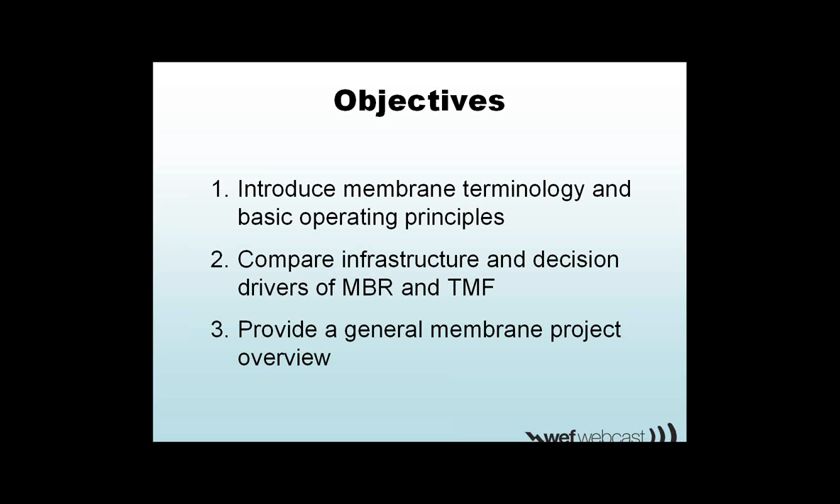Good morning. Give me just one second while I get my slides working here. There we go. So before I jump into the presentation, I'd like to give you an idea of the objectives for this first half-hour presentation. The first is to introduce membrane terminology and basic operating principles so that in the next two presentations you have some background on the vocabulary words that will be thrown around. Then to compare the infrastructure and decision drivers of membrane bioreactors and tertiary membrane filtration. And finally, to provide a general membrane project overview.

So what are the uses of reclaimed water? I think it's no surprise to anyone that there are a variety of uses for reclaimed water. A lot of what this water will be used for is driven by what's close to the treatment facility and really what the objectives are for going towards water reuse.

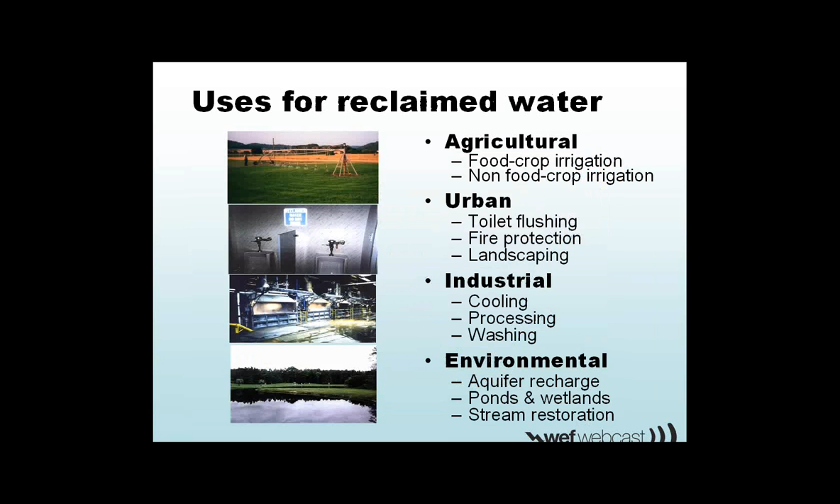Okay, so we've established membranes are great, but what is a membrane really? A membrane is a thin, semi-permeable polymeric film adhered to a support surface that retains some substances but not others. What does that really mean? Here's a very close-up view of a membrane. This would be a hollow fiber, and on the surface of this membrane we see that we have some pores here. The treatment of this membrane is driven by the pore size, which is shown in this picture here.

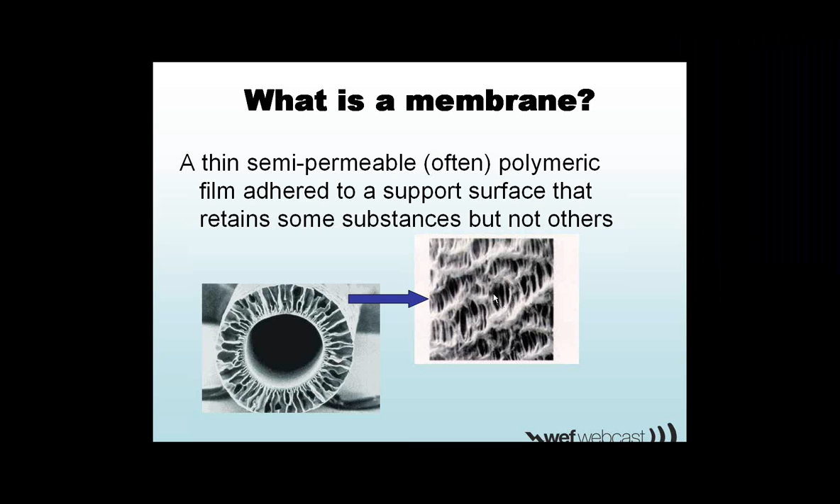In fact, there are a variety of different types of membranes in filtration, starting with media filtration and getting to a higher quality as we go down the line. So membrane bioreactors and tertiary membrane filters are in the microfiltration and ultrafiltration size range. What that means is that the pore size of the membrane is in the 0.1 to 0.5 micron range for microfiltration, or around 0.01 micron for ultrafiltration.

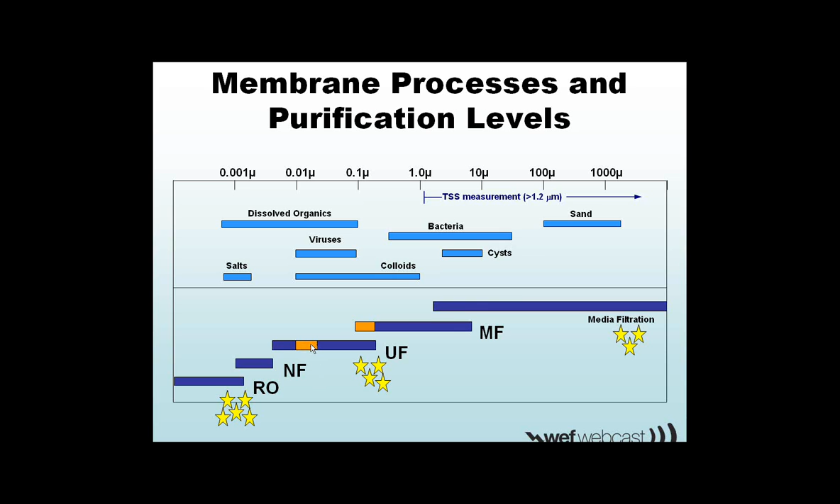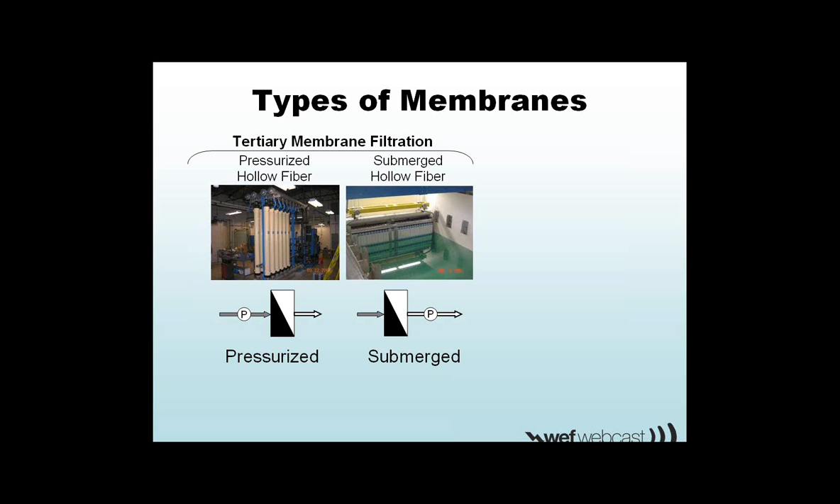So once we start to go to membranes, we need a driving force. We have a membrane, and the membrane cleans the water, and there needs to be some sort of driving force to get the water to pass through the pores of the membrane, and that driving force is pressure. There are two ways that we can configure membrane systems. The first is called a pressurized system, meaning we pressurize the feed water to the membrane and force the water through the membrane in that direction, as opposed to submerged, where we actually draw a vacuum on the effluent. The driving force comes from having atmospheric pressure on the feed water side and a vacuum on the clean water side. So when we look at different types of filters, very often, these are general types of filters, what you'll see with tertiary membrane systems is hollow fiber, either pressurized or submerged.

Whereas in MBRs, though you do see some pressurized systems, by and large they're submerged systems, and you'll see both submerged hollow fibers and submerged flat sheets.

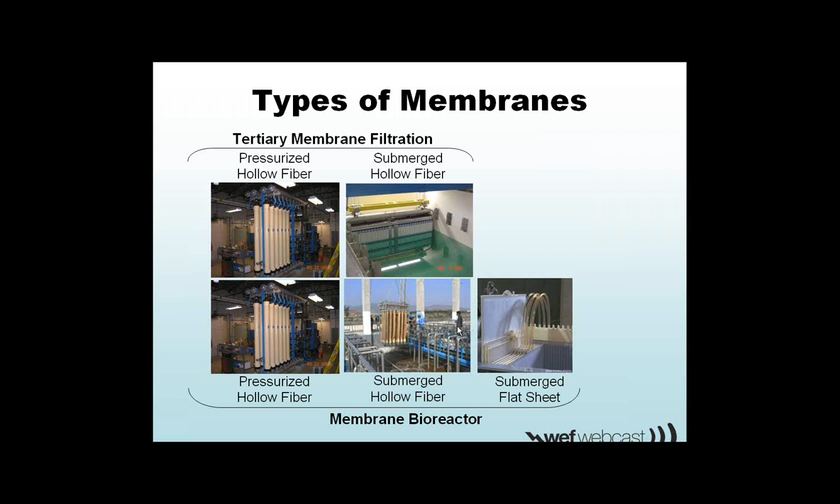All right, more key membrane vocabulary. This box here represents an idealized membrane, and the feed water comes in with dirty water. This is essentially the dirty water, and it goes to the membrane, which would be represented as that active layer here, and the constituents are concentrated and removed, and the clean water passes through.

Clean water in membrane systems is referred to as permeate or filtrate, whereas that concentrated solution of contaminants in tertiary membrane filtration would be called retentate or concentrate.

In MBRs, if we recall, we've replaced the clarifier with the membrane. So this concentrated stream is in fact the biomass that's doing the treatment of the wastewater constituents, and in an MBR, this is return activated sludge or mixed liquor.

So second key vocabulary term, flux. Flux is essentially a loading rate on the filter, and it's the flow rate per unit membrane area. In American units, it would be gallons per square foot of membrane area per day. In metric units, it's often liters per square meter per hour, or LMH.

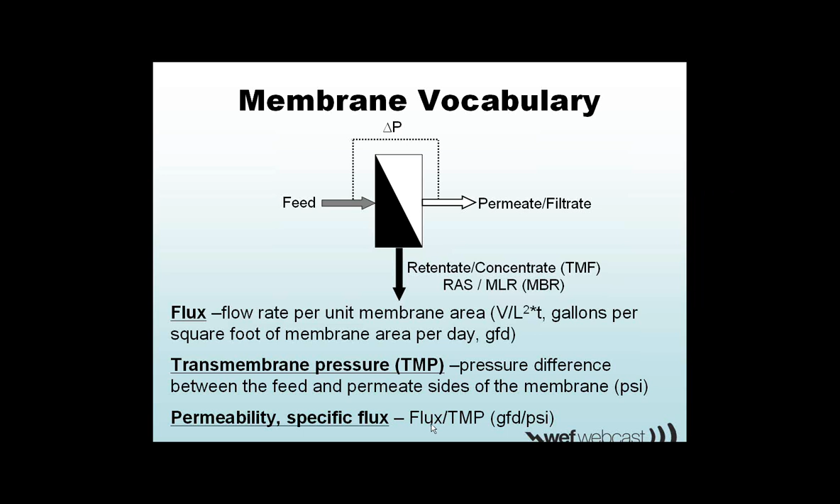We talk a little bit about the driving force of membranes, and that really is a difference in pressure - the transmembrane pressure. What you'll see often is that the flux and transmembrane pressure are related. So it's sometimes nice to refer to them in one single unit, called permeability or specific flux, which is just the flux of the membrane divided by the transmembrane pressure.

As I mentioned, the flux and the transmembrane pressure are directly related. So if you want to increase the flux, you're also going to increase the driving force required to generate that flux. They're pretty linearly related if we have clean water. However, if there's contaminants in the water that we're trying to remove, we find that we lose the linearity of the relationship.

So essentially what that means is that it's harder, as the membrane fouls, to generate the same flux that we want. For instance, we could fix the flux, and then as the membrane fouls, the transmembrane pressure will change. Alternately, we could fix the transmembrane pressure, and as the membrane fouls, the flux changes. So membrane fouling, by definition, is essentially the accumulation of these contaminants on the membrane surface or inside the pores that reduces the production of the membrane.

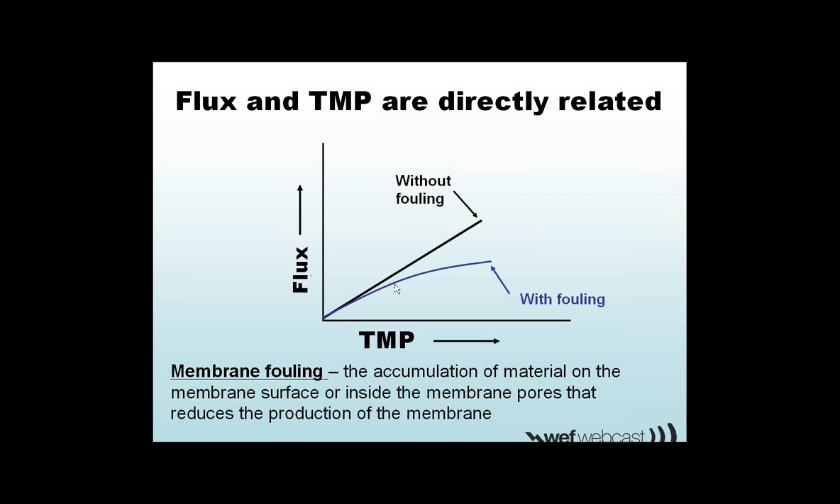As I mentioned, membrane fouling reduces the production of product water through the membrane. So as the membrane fouls, it's harder and harder to pull the same flow rate through the membrane.

By and large, membranes in water and wastewater applications are operated to achieve constant flux. So essentially what that means is we fix the flux, and we watch the transmembrane pressure change as fouling occurs.

And maybe just to restate this once more, when we fix the flux, as the membrane fouls, it becomes harder and harder to generate that same flux. So we need a higher driving force to get the water through the membrane. This is an indication of membrane fouling.

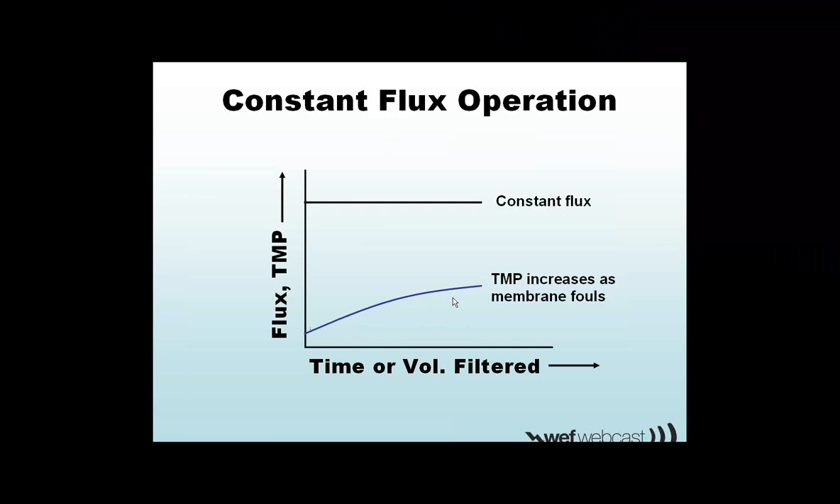Membrane fouling. This is kind of the bane of a membrane system, and we spend a lot of time and energy controlling this fouling that occurs. So what are the things in the dirty water, which would be, for instance, the mixed liquor in an MBR or the clarifier effluent in a tertiary membrane filtration, that cause membrane fouling?

So we have colloids, which are just small particles, and macromolecules, which are large individual molecules, things like proteins and carbohydrates. We have suspended solids.

The degree to which we have suspended solids is going to be pretty different between an MBR and a tertiary membrane filter. For instance, in an MBR, those suspended solids are activated sludge flocs, or bacteria embedded together as a group. We'll get some inorganic precipitation, and we'll have some biofilm growth.

So as we operate the membrane, what we're doing is convecting water and all these constituents, or membrane foulants, right to the membrane surface. We generate treated water, and we get a concentrated mass of those things on the membrane surface that cause fouling.

These are general terms that characterize the different types of fouling that happen. Adsorption is the chemical interaction between things like macromolecules and the membrane surface. Pore blocking happens when colloidal particles, which are pretty close to the pore size of the membrane, block the pores or accumulate inside.

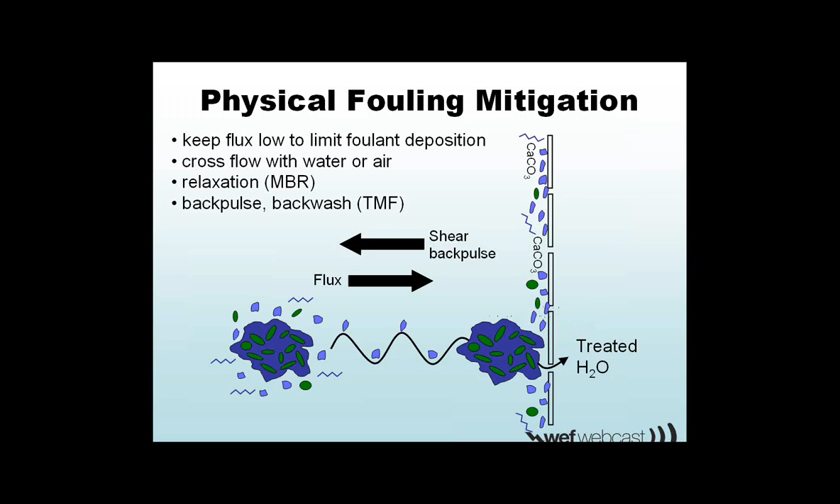The second class of fouling control is chemical fouling control, generally called chemical cleaning, which means we clean the membranes with bases or oxidants, very often chlorine, to remove macromolecules and biofilms that accumulate, and acids to dissolve inorganic precipitates.

There are two scales of chemical cleaning we see with membrane applications. The first is called a chemically enhanced backwash, or maintenance clean. It's short duration, happening most often when the tanks are still full with the feed water. It happens over 1 to 2 hours, daily or weekly, and chemicals like chlorine may be injected with that backwash water to maintain the flux through the membrane.

The idea with this chemically enhanced backwash is to extend the interval between the more intense clean-in-place, or recovery, cleans. These are longer duration cleans, lasting 4 to 8 hours, and require the membrane tanks to be taken offline. The tank is filled with a series of chemicals—again, bases, acids, oxidants—and the membrane is thoroughly cleaned.

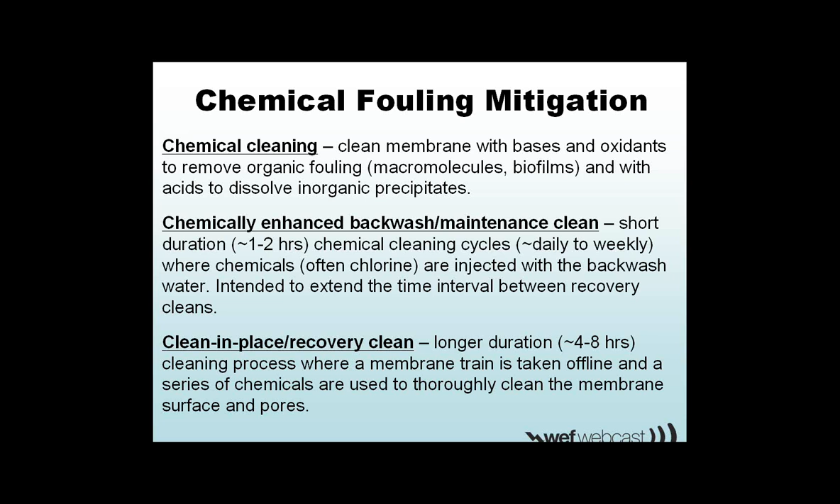Because we spend so much time and energy dealing with fouling, this creates the need for all these ancillary systems to let us do chemical and physical cleaning. For MBRs and tertiary membranes, you'll need chemical cleaning systems, and I think you'll see a nice illustration of this in the case studies of what goes into these extra cleaning systems—chemical cleaning systems, and physical cleaning systems like blowers for air scour or pumps for backwash.

All right, there are one or two pieces of vocabulary that relate just directly to tertiary membrane filtration. In tertiary membrane filtration, we have the feed water, and we produce permeate with a certain instantaneous flux - this is the flow rate that comes right through the membrane.

However, some of that water is used for chemical cleaning - we actually use treated water to make the solutions for chemical cleaning - and some of it may be used for backwash. So we lose some of that product water we generate, and in the end get a net production which is not necessarily the same as this instantaneous flux. This brings us to the idea of recovery, which is the efficiency with which feed water is converted into product water. So the more we have to clean, the lower the recovery.

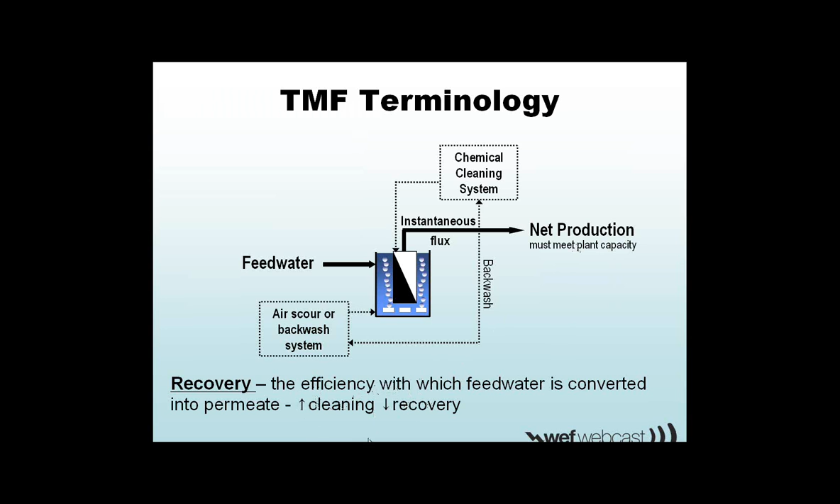All right, so I've gone through and covered a lot of the basic membrane terminology. In fact, the membranes in both tertiary membrane filtration and MBR fundamentally work on the same principles. They use, by and large, the same vocabulary - they're just a different application condition.

So the next part of this little introductory presentation will look at a comparison between two systems treating, for instance, the same volume of wastewater, either using tertiary membrane filtration or MBR. One piece I'd like to remind you of is that with an MBR, with the air scour, it generates an oxygenated return flow.

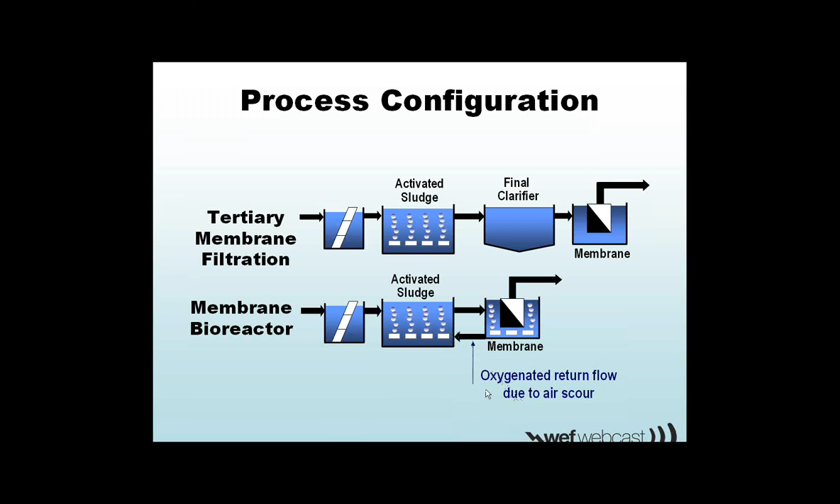All right, relative comparison between the two. I think some of this won't be a surprise, and some of it, as I learned about membranes, was kind of a surprise to me. The first one is land use required. You still have a clarifier with tertiary membrane filtration, so you can imagine that means you need more land area. For similar reasons, there's two processes to operate with a tertiary membrane filter - an activated sludge system and the filter.

Both are membrane processes, both produce great quality effluent. But if you want to start doing things like decentralized treatment, tertiary membrane filtration really is not an option because you have the clarifier to operate. With an MBR, you have an absolute barrier - it doesn't matter what the biomass is doing, it'll be retained by the membrane.

It can be very highly automated, so MBRs are good for decentralized or unstaffed operation potential. The capital cost, for instance, for a greenfield project may be higher with a tertiary membrane system just because you have more tanks and more processes. However, the operating cost for an MBR, by and large, because of that air scour, will be higher.

So if we look at the biological process solids concentration, it's much higher with an MBR. However, if we look at the solids concentration at the membrane, this is really a key difference - you're seeing the effluent of a clarifier with a tertiary membrane filter, whereas the MBR is seeing the mixed liquor concentration. So maybe the best way to think about this is the concentration of foulants at the membrane. You can imagine with a low concentration of foulants, much less membrane fouling compared to this very high 8 to 12 gram per liter solids that the membrane is seeing. That is a really major difference between the two.

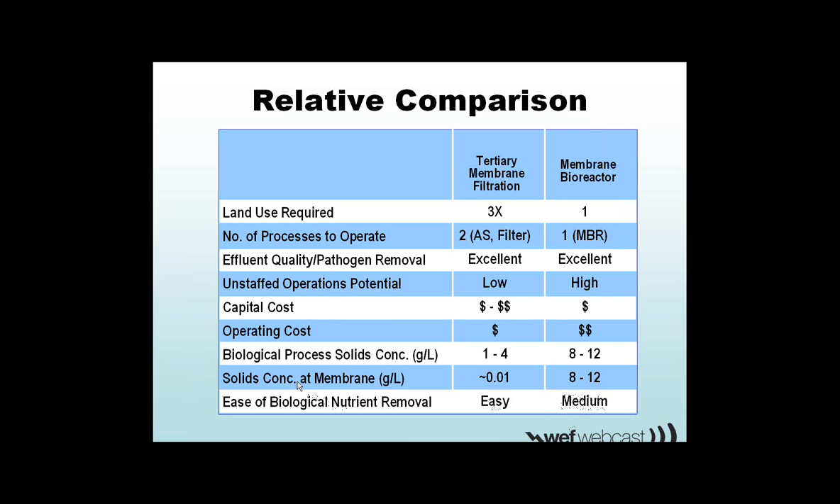So if you, or if me as an engineer or as an operator, are looking at water reuse and wondering which application makes the most sense, there are a couple of different questions you can start to ask that will separate out the decision drivers. One key one is: are your reuse water users seasonal? If you have 10 mgd of wastewater that you're treating, but only 1 mgd of reuse water users lined up, a tertiary membrane filter may be a better application there because you can turn the system off in the winter.

If you have significant seasonal wet weather flows, again, we talked about how we can decrease the flux to minimize membrane fouling, but similarly, if we increase the flux, you have a high concentration of membrane foulants in an MBR. You are pulling more of those foulants right to the membrane surface, and so it makes it very difficult to control the membrane fouling when you need to crank the flow up in an MBR.

If you have significant seasonal wet weather flows, a tertiary membrane filter is much more forgiving and may be a better option, though I have seen some very creative ways that MBRs have been applied and worked around with the seasonal wet weather flow issue.

If your plant relies on BioP but has a very low phosphorus limit, a tertiary membrane filter may be easier because you can do a chemical polishing step after the clarifier and then remove the metal salts with the filter. This is important because adding metal salts to a biological BioP system can really hinder the recovery if you have an upset. So this tertiary filter may make your life easier with BioP removal and a low phosphorus limit where you'd need chemical polishing at times.

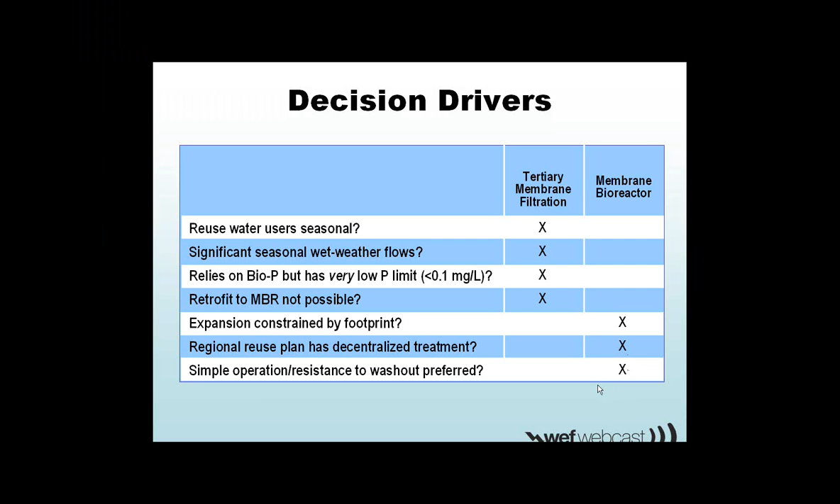All right, so now you've decided that you want to do a membrane system, and the question is, how does that happen? What's the best way to approach the design of these things? In essence, you really can't start to procure a membrane before 15% design because the vendors need an idea of what you're asking from the membrane system. So you need to define those site-specific parameters, operating characteristics, and redundancy requirements. However, if possible, you'd prefer to procure before 30% design because all the systems are different, so if you can do your detailed design around a specific vendor, that's the preferred approach.

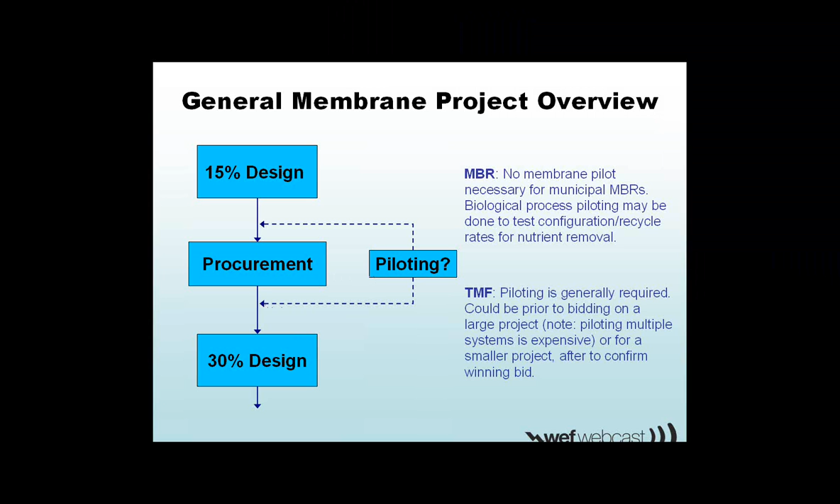Often with tertiary membrane filters, piloting is preferred, and it's important to note that piloting, especially with multiple vendors and big systems, can be expensive. So it would be nice to pilot before the project on a large project, though on smaller ones, what you may do is procure a membrane and pilot afterwards, or have a demonstration period afterwards to show that the system will perform as expected.

And then lastly, moving on to detailed design, the equipment is unique to each vendor, and it's really beneficial to know what that equipment will be and what the flow rates are before completing the detailed design of the plant.

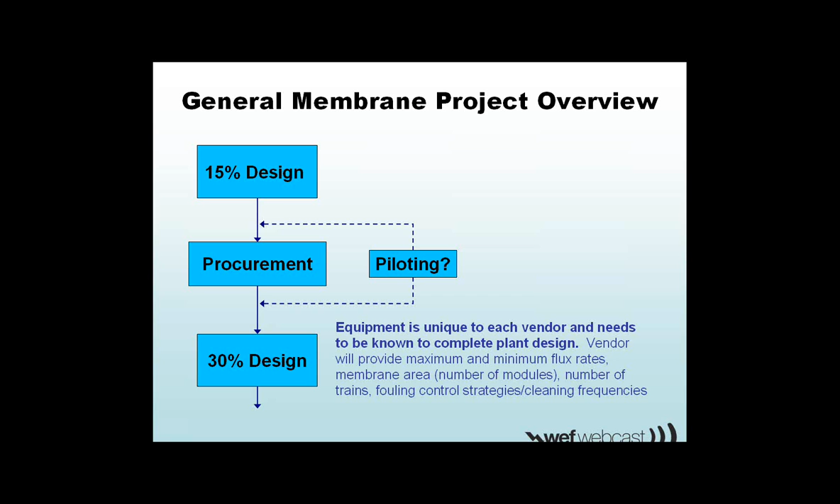So with that, we've talked a lot about membrane vocabulary, flux, permeability, transmembrane pressure. We've talked about membrane fouling and cleaning, and a general membrane project overview. From here, this will carry on to the case studies, and I'd be happy to answer any questions you have.

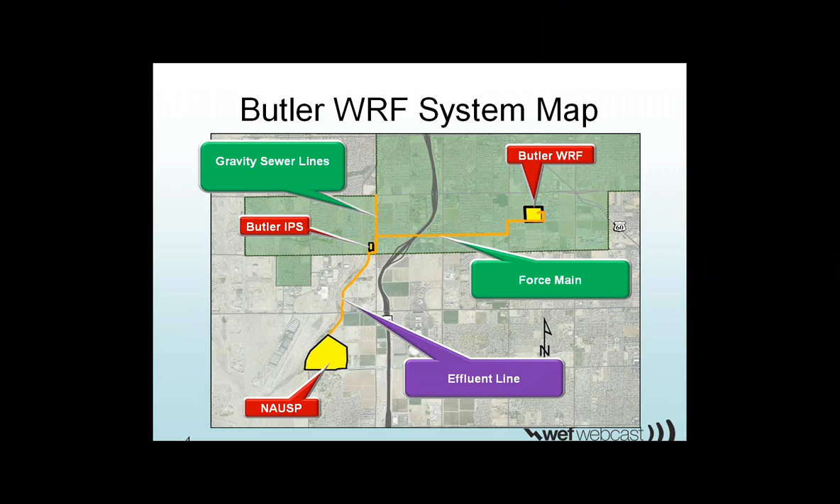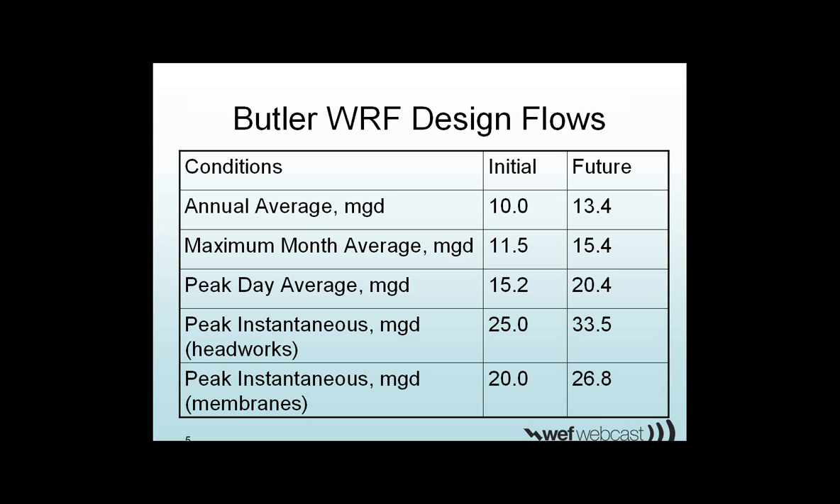Here are the design flows. The plant, for the initial phase, is designed for 10 MGD annual average flow, and the future ultimate build-out would be 13 MGD. The point to note on the slide is the peak instantaneous flow through the headworks is 2.5 times the annual average flows, whereas the peak instantaneous through the membranes is only twice the annual average flows. I'll talk a little bit more about this a few slides down.

Here are the design wastewater characteristics. As you can see, for the initial and future conditions, the BOD, TSS, and TKN are really different. This is because in the initial phase, the plant treats solids from another facility.

When Butler Drive is expanded to 13 MGD, solids at the other facility will be treated on site and will no longer discharge to the Butler Drive collection system. The initial aeration basins will have sufficient volume to treat 13 MGD without additional solids load from other facilities. With this design approach, the city was able to delay solids processing facilities at their treatment plant.

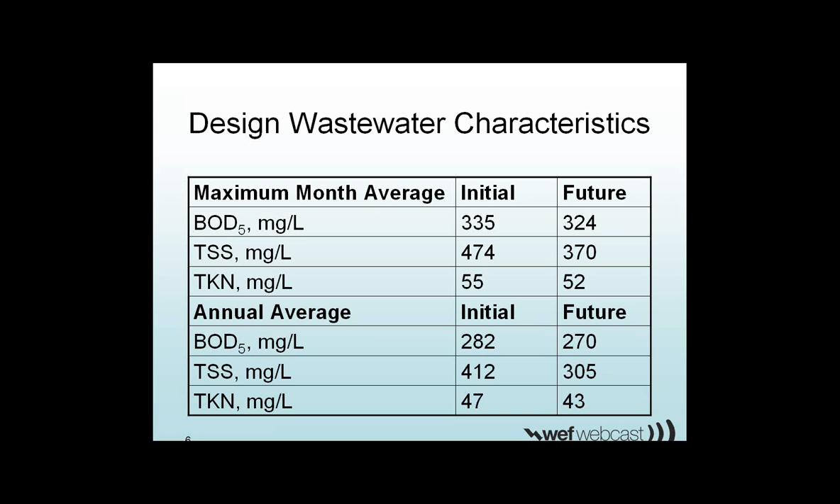The plant has to meet effluent quality standards. It has to meet Class A+ reclaimed water set by the Arizona Department of Environmental Quality and Aquifer Protection Permit. It has to meet turbidity less than 2 NTU on a 24-hour average, with maximum not to exceed 5 NTU. Total nitrogen less than 10 milligrams per liter with an alert at 8 milligrams per liter, so really the plant was designed around the 8 milligram per liter goal. Fecal coliform no detect in 4 out of 7 samples, with a single sample maximum of 23 CFU per 100 ml.

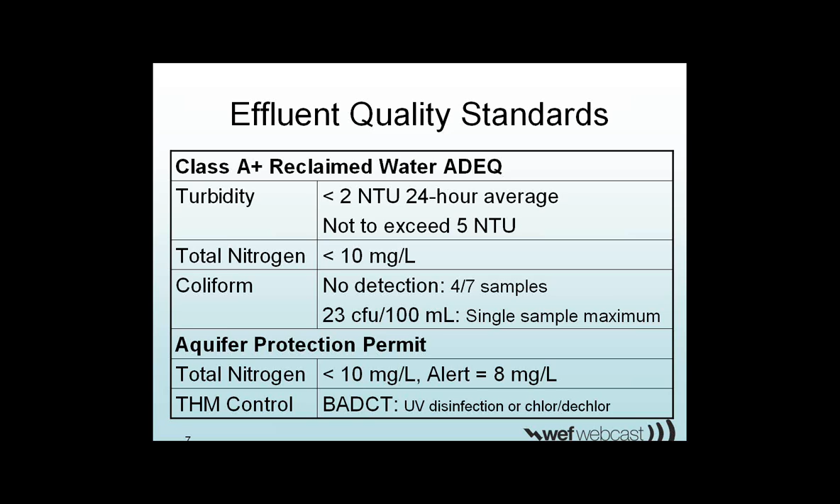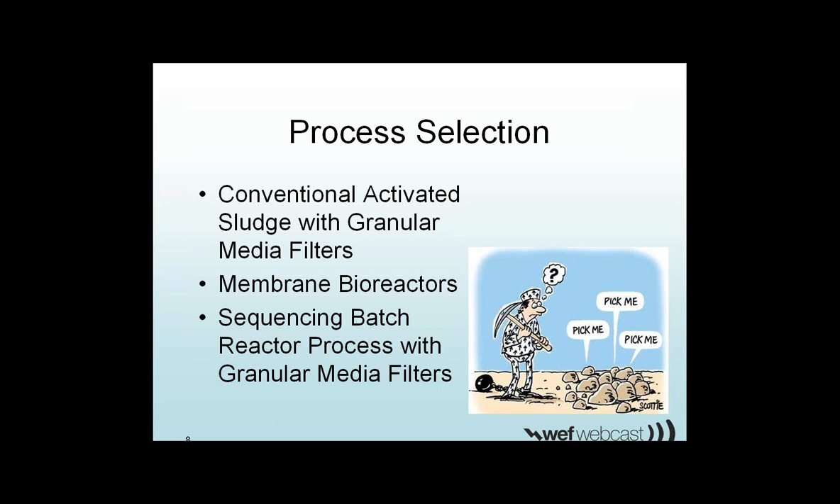Process selection: a key consideration was compatibility of the new treatment facility with its surroundings, population growth, and community acceptance. Three technologies were chosen: conventional activated sludge, membrane bioreactors, and sequencing batch reactors. Out of these three, two were shortlisted and further evaluated - conventional activated sludge and membrane bioreactors - and they were evaluated based on various factors listed on the slide, which I'll go over one by one.

Cost, I will talk about on my next slide. Proven technology: conventional is well known, while membrane technology itself is proven but its wastewater application is of emerging status. Odor control: both technologies were equal. On mechanical simplicity, both use conventional equipment, but MBRs use more of it. Process stability: conventional is subject to biological process upsets, while MBRs are unaffected by biological process upsets, and bulking issues are eliminated in MBRs.

Staffing requirement: MBRs require fewer operators to maintain the biological process and handle solids. On effluent quality, conventional can easily achieve a turbidity of less than 2 NTUs, and MBRs can achieve less than 0.1 NTU.

Expandability, both are equal. Footprint, of course, MBRs are smaller. Noise containment, both are equal. Visual aesthetics, MBRs are more compact with fewer structures. Solids processing, MBRs eliminate the need for sludge holding basins and provide a greater degree of solid stabilization.

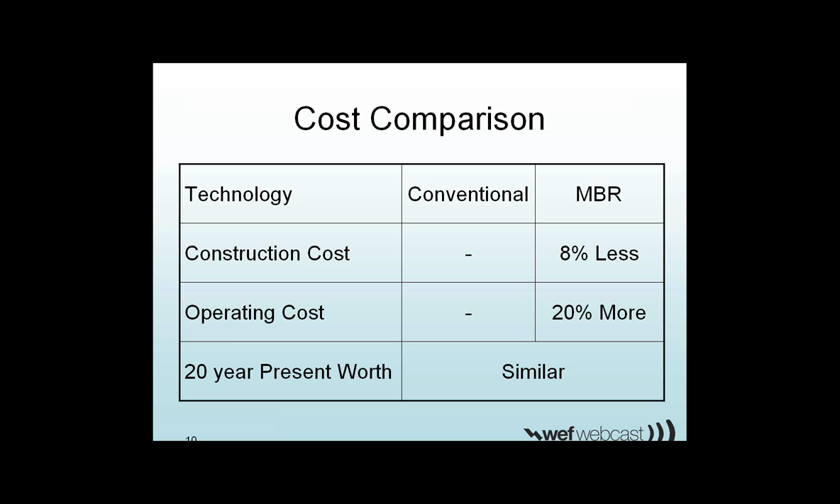So MBR technology was selected because it was similar in cost to conventional treatment while offering benefits in terms of reduced footprint, process stability, exceptional effluent quality, and ease of operations.

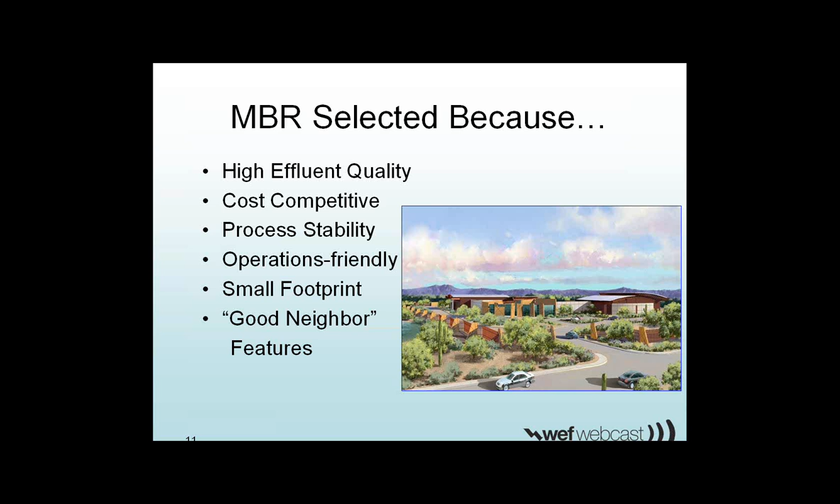Membrane procurement. The project team used a qualifications-based process to pre-select the membrane supplier. The team presented a request for qualifications to 3 potential membrane suppliers, based on a 100-point system, and each supplier was rated on that scale. The 4 main categories were corporate stability and financial capabilities.

Under this category, the membrane suppliers were required to submit detailed descriptions on ownership structure, financial statements, and bonding capabilities. They were also required to disclose any lawsuits or bankruptcies.

The next category was experience, qualifications, and manufacturing capabilities, which included information on comparable sized facilities operating inside and outside of the United States. Next was demonstration of successfully operating facilities. This included detailed questionnaires on design and operation of at least 3 North American installations that were in service for at least 2 years.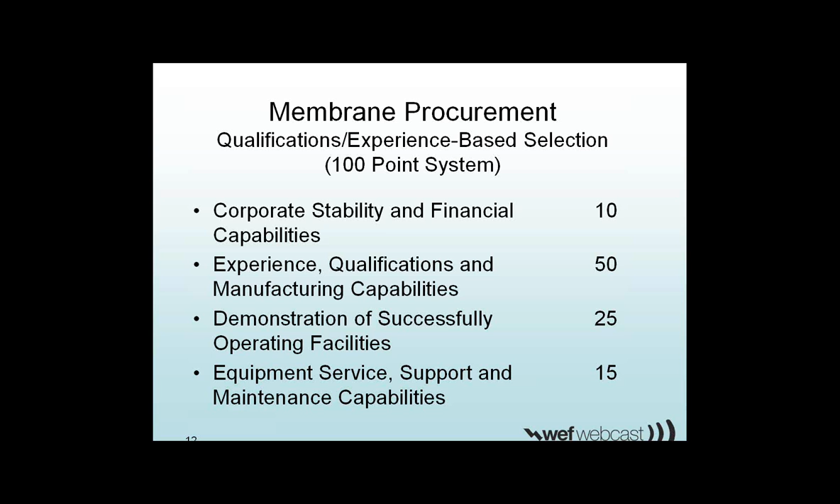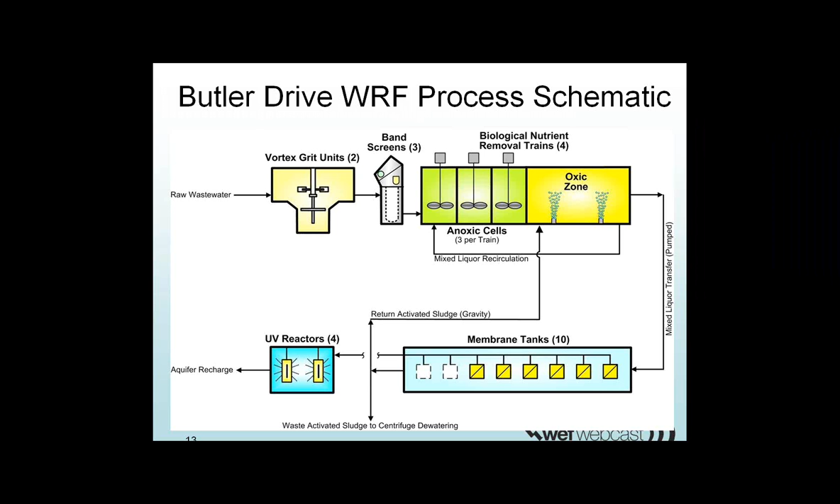The facility has infrastructure in place for its build-out capacity of 13 MGD. The membrane quantity initially installed gives the facility 10 MGD of capacity. As population and wastewater flow increase, additional membranes will be installed to increase the plant capacity to 13 MGD.

Benita, could you speak up a little bit? Yes, sure. Thank you. Is it any better? I think that is. Thank you. Okay.

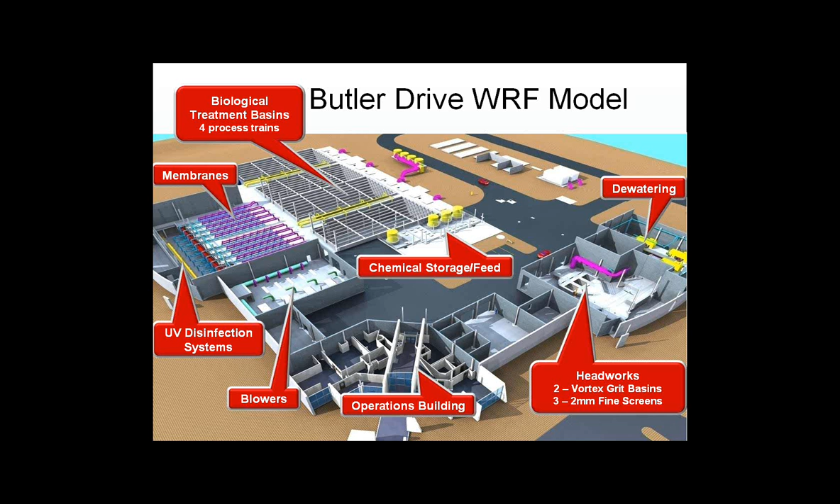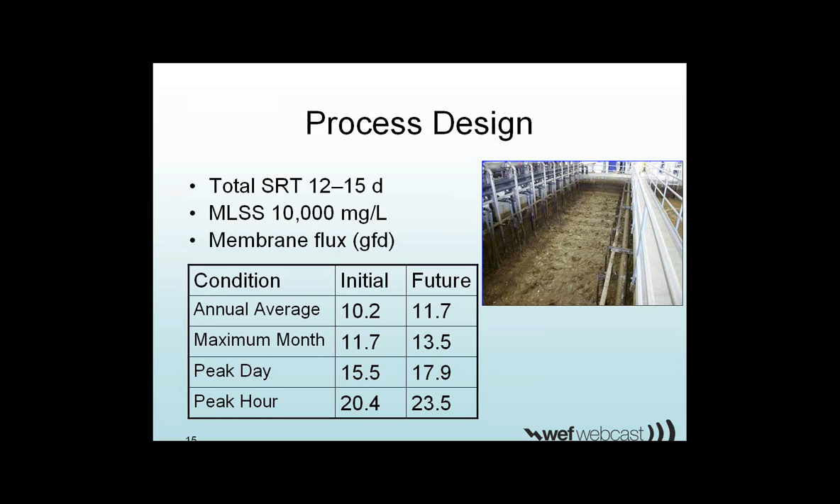Preliminary treatment and equalization. The plant was designed with 2 sets of screens to protect membranes: half-inch bar racks at the off-site pump station and 2 mm fine screens on site. For large plants, it is very beneficial since this reduces the amount of fine screening production and also reduces load on the fine screens.

Flow equalization is very important for MBRs. Membrane sizing is hydraulically driven, so alternatives to increasing the number of membranes should be considered if the peak flow is more than twice the average flow. Designing membranes to accommodate higher peak flows typically results in flux rates at average flow which are below the optimized point and significantly increases equipment cost.

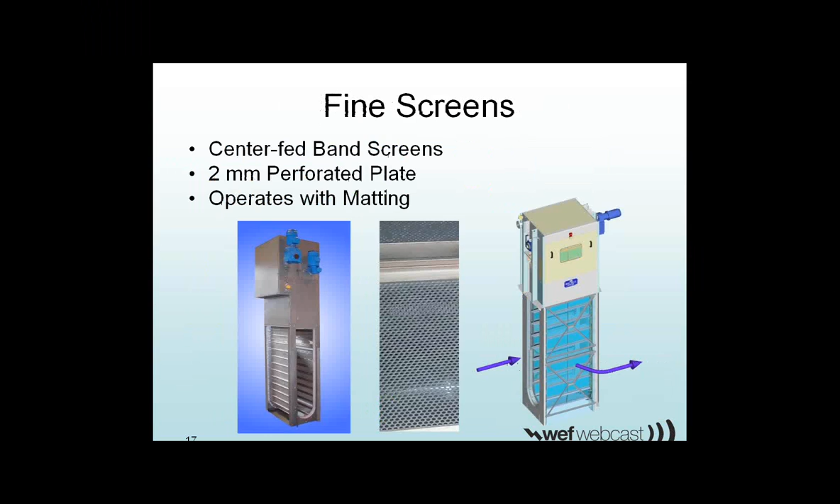The mixed liquor is transferred from the recirculation pump station to upstream of the membrane tanks. This is the upstream distribution channel into the membrane tanks, and the flow goes into the membrane tanks and then out of it. The permeate pumps draw a vacuum on the inside of the membrane hollow fibers, pulling water through the membrane pores and leaving rejected solids in the membrane tank. Membrane permeate is disinfected using in-pipe UV units.

One of the keys to successful denitrification is the independent solids and nitrate recycle. As Adrian mentioned earlier, due to the membrane air scour, return activated sludge from the membrane tanks has a very high DO concentration. So introducing this stream to the anoxic zone would impair denitrification. To avoid this, the RAS is routed to the upstream end of the oxic basin.

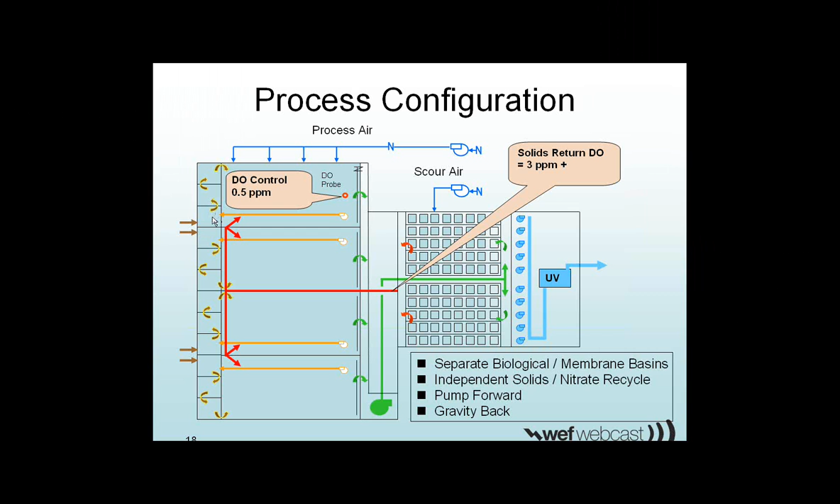There are 10 membrane trains on site. Each train has 6 cassettes with 2 blank spaces. To increase plant capacity from 10 to 13 MGD, a 7th cassette will be added to each tank. The 8th space represents a safety factor to guard against unforeseen conditions. Each cassette has 48 modules with a surface area of 340 square feet per module.

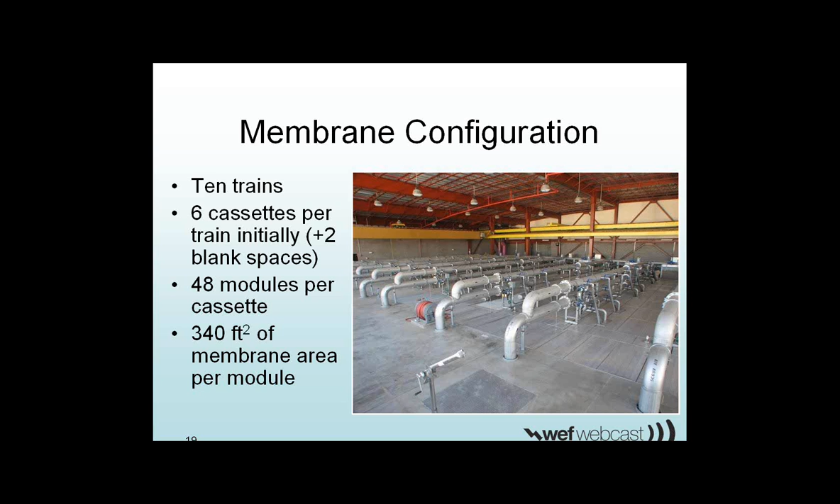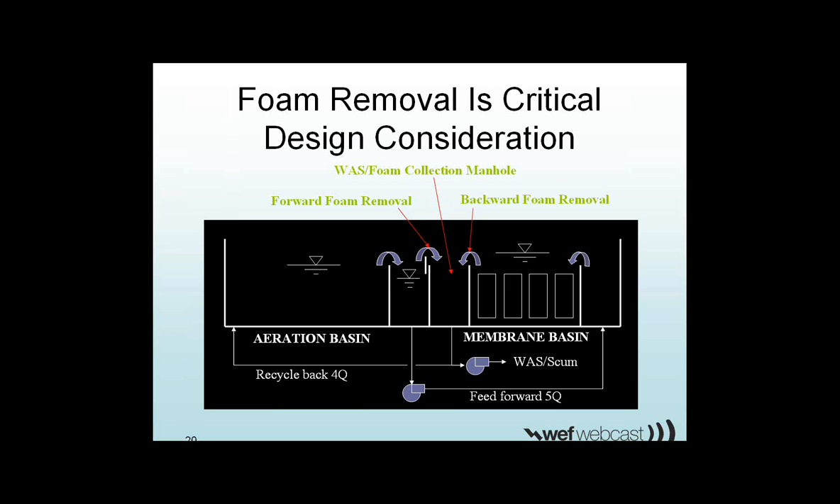Startup and operations: the plant was commissioned in June of 2008. The plant went from 0 to 8 MGD within 3 weeks. The plant has met all effluent requirements.

The average mixed liquor suspended solids in the aeration basins is around 10,000 milligrams per liter. To keep electrical costs down, the plant has been controlling the DO within the basin to achieve a small amount of simultaneous nitrification-denitrification. Typically, the DO is tapered within each oxic basin between 1 milligram per liter at the head of the tank and 0.5 milligram per liter at the end of the tank. This has resulted in very low effluent TN numbers, and I'll show you a graph in my next slides showing the effluent total nitrogen from the plant.

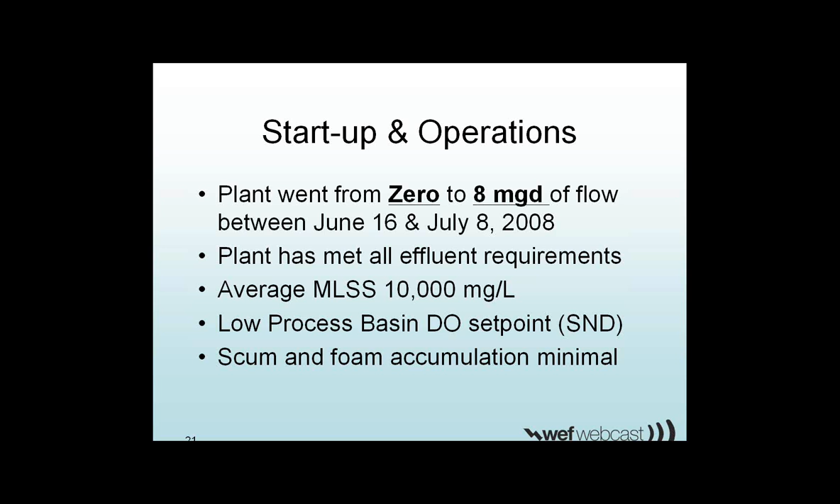The plant wastes solids 5 days a week, 8 hours per day. No waste solid storage tank is required. The increase in mixed liquor suspended solids over the weekend is typically 1,000 milligrams per liter. The dewatering centrifuges are fed solids directly from the biological basins, and they produce a cake in the range of 18 to 20%, which is really exceptional for biological sludge.

Flux management and cleaning: membrane productivity is sustained by a variety of methods. During permeate production, intermittent air scour is applied to the bottom of each membrane cassette to prevent solids and other material from accumulating on the membrane surface. There are two modes of air scour: when the flux is greater than average flux, the 10-10 cyclic aeration is used, and when the flux is less than the average flux, the 10-30 cyclic aeration is used.

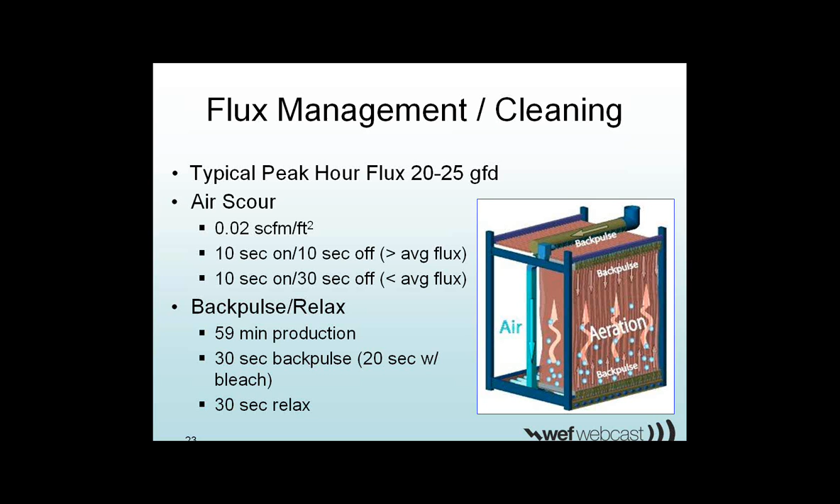In addition to air scour, for 60 seconds per hour, permeate production stops. For the first 20 seconds, the membranes are backpulsed with sodium hypochlorite solution. For the next 10 seconds, membranes are backpulsed with permeate alone. For the last 30 seconds, the membranes relax while membrane air scour continues.

Maintenance cleaning occurs a few times per week. Mixed liquor is drained from the membrane tank. Sodium hypochlorite or citric acid solution is backpulsed through the membranes, and the membranes soak in the chemical solution for about an hour. Recovery cleaning is similar to maintenance cleaning, except that it occurs every 6 to 12 months and is for a longer duration of 3 to 4 hours.

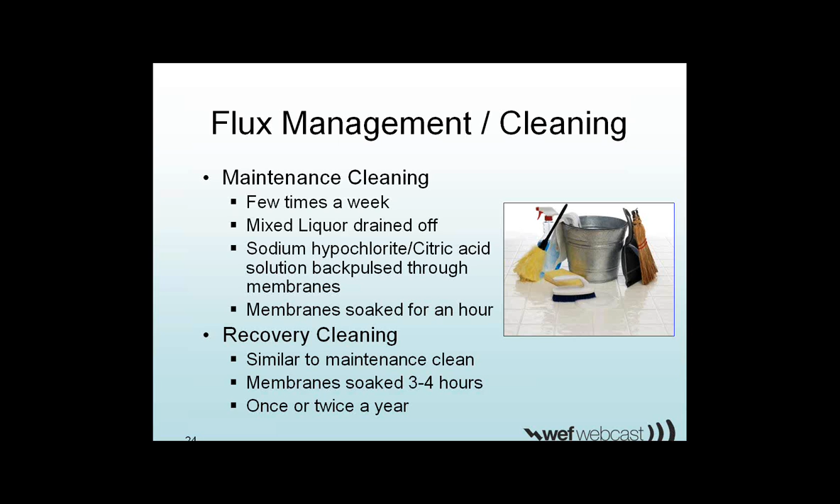This graph shows the effluent total nitrogen. On the y-axis is the effluent concentration of ammonia, nitrate, and TN. The blue line is the total nitrogen. Beginning August 2008, the plant has been meeting the 8 milligram per liter TN goal. The fine line and DO control required for simultaneous nitrification-denitrification is shown by the occasional increase in the ammonia accompanied by very low nitrates. You can see these red ammonia blips, and the nitrates are low during that time. The total nitrogen value does not vary significantly as the sum of the nitrogen species remains the same.

For a plant with TN limit only, this operation is fine, but if a plant also has an ammonia limit, the operation could really be challenging, especially in cold weather climates where you don't want to lose nitrification.

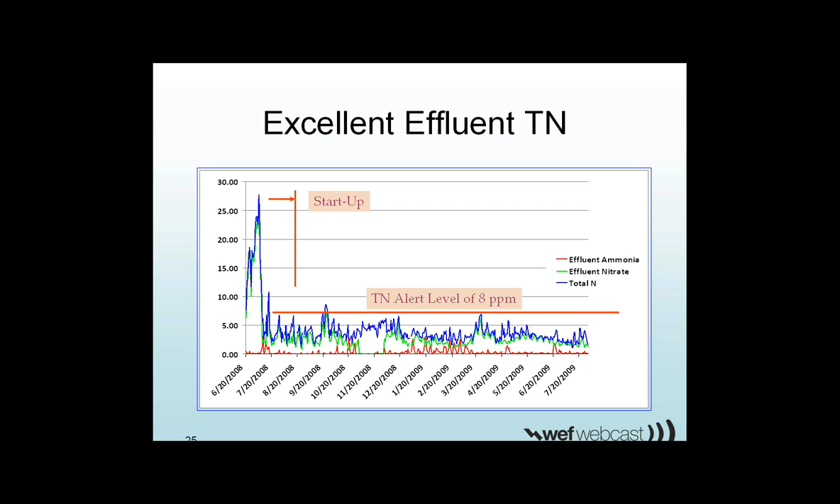This graph shows the effluent turbidity. As you can see, the turbidity has been well below the 2 NTU requirement. Most of the time, the turbidity has been below 0.1 with occasional blips.

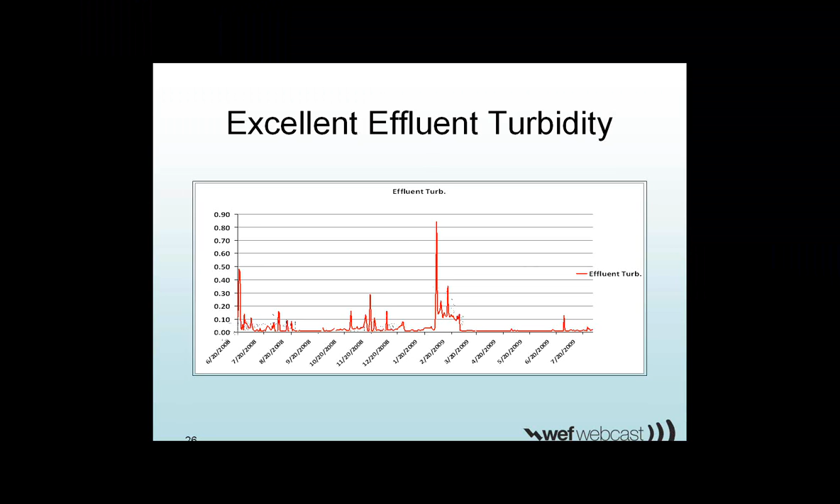Operational challenges. The plant has been in operation for more than a year now, and there definitely are some lessons learned from that. Membrane sludging: what this really is, is when the membranes accumulate solids between the membrane fibers that do not allow raw water to reach the membrane surfaces. The plant has seen membrane sludging at random locations. I will talk about it in more detail in my next slide.

Membrane cleaning and permeability. The plant did not pay close enough attention to the maintenance cleans, and permeability started to decline. After 6 months of operation, the plant has been regular with maintenance cleans and has had no problems since then.

Fine screening: plant staff found some material larger than 2 millimeters passing through the fine screen, for example, like dental floss. It could be related to initial manufacturing issues or problems with grouting the screen, as they saw some cracked grout. The jury is still out on this, so we'll know more.

Instrumentation and control. The operators have noted that instrumentation and control associated with the MBR process requires a lot of attention. There have been numerous nighttime response calls. The city now has a full-time instrument technician at the plant.

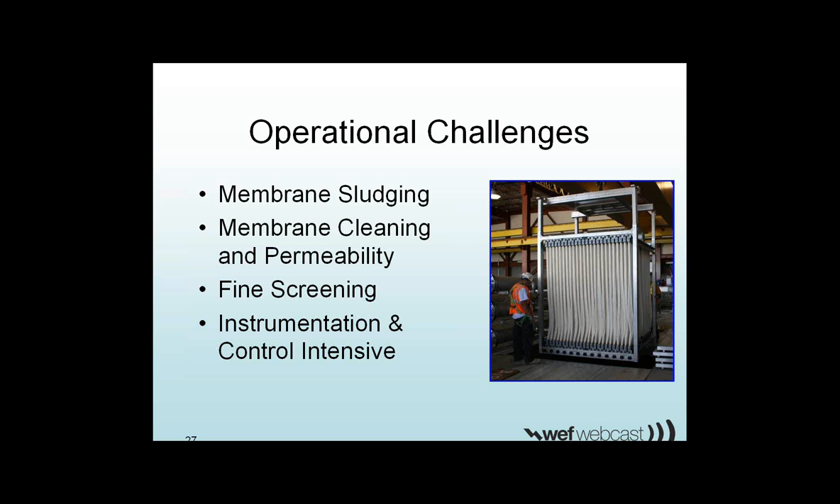Air tube plugging: it was found that over time, air tubes at the bottom of the cassettes filled with sludge when scour air was off and then dried out when scour air was on, but this was ruled out as a cause. The cassette installation was checked to make sure installations were plumb and cassettes were sitting straight.

After investigations, it was found that the membrane fibers and cassettes shrank more than anticipated, and the cassettes had to be adjusted for slack. This slack adjustment was really labor and time intensive, and the plant has recently finished fixing the slack adjustment.

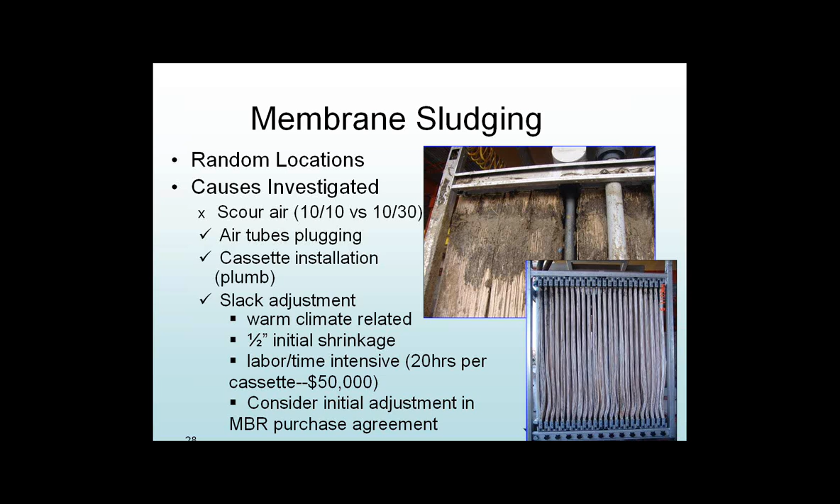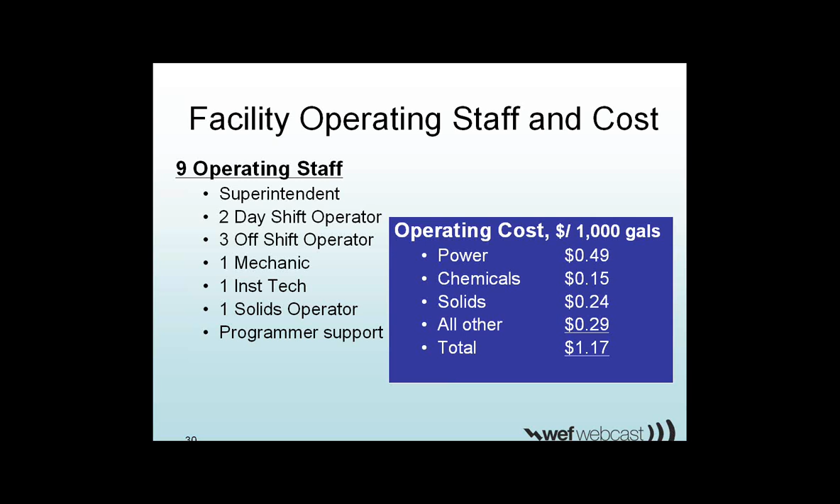That's all I have, thank you very much. Thank you very much, Benita. We have a number of questions for you sent in while you were talking.

The first involves process selection, not specific to membrane bioreactor, but specific to disinfection. How and why did you choose UV for disinfection downstream? And did the regulatory agency allow you any benefit to using membrane instead of a conventional approach?

The UV was chosen because of the aquifer permit requirement, shown on my slide if I go back. The aquifer protection permit had THM control requirements for best available technology. So UV disinfection was adopted for that, and it worked well with the permeate. They use in-pipe UV disinfection.

The second part to that question was, did the fact that you use a membrane bioreactor allow you to use a reduced UV dose? For the design, I think 70% transmittance was used instead of the usual 60%. So, yes.

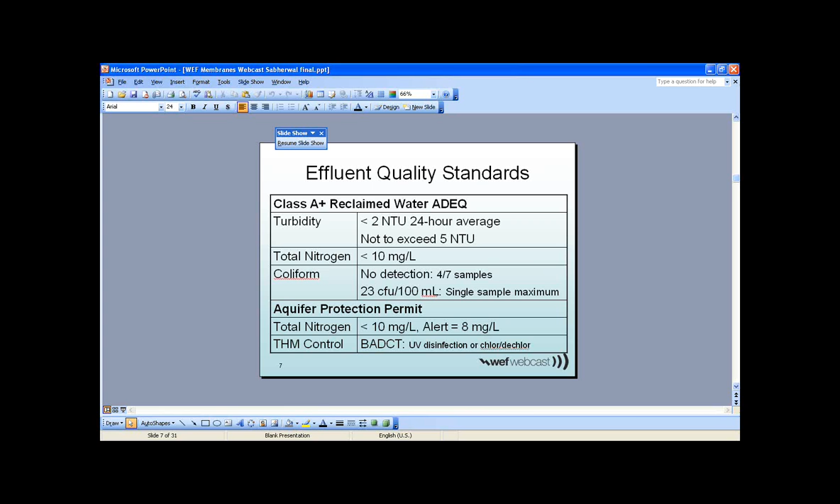Thanks, Paul. Can you hear me? Loud and clear. All right, great.

I am going to talk this morning, over on the West Coast where we are, about Clark County Water Reclamation District here in Las Vegas and their case study of how and why they went to tertiary membranes.

Let's see - Renee, I'm not having full movement of my slide. Mary, did you try the opaque arrows in the left-hand corner? Yeah, I'd try that, see how many it'll go over. Working? Not working. Click one more time for me. Oh, there you go - gonna now go two clicks.

All right, I'll hit this slide while it's there. We're going to go through the introduction of the project, then talk about the design criteria of the membrane system, and discuss why the district, Clark County, went to tertiary membranes rather than MBR. We'll discuss the pilot testing being conducted right now, talk about the design characteristics we evaluated through design, and wrap up with some of the operational challenges found through the design and pilot testing to date.

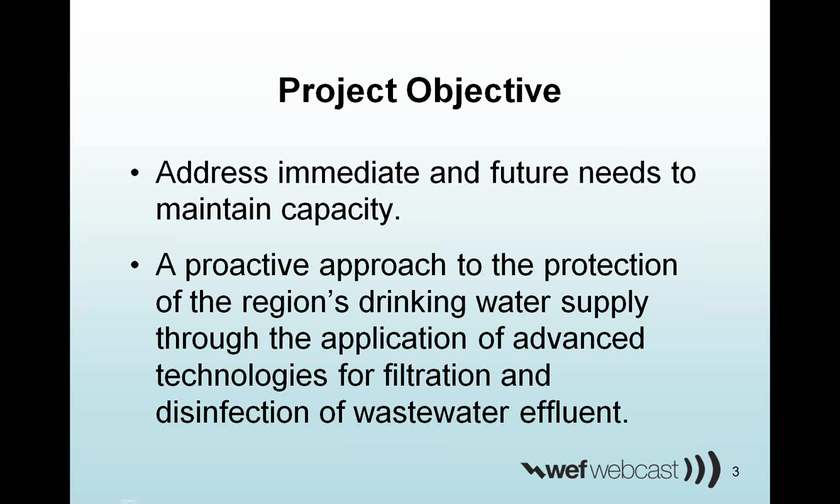In addition, they have taken a proactive approach to protecting the region's drinking water supply, and the next slide shows you why. We have a unique situation in Las Vegas where we discharge and pull out of the same body of water for our wastewater and our drinking water.

This is Lake Mead, and over to the right is the entrance to Lake Mead through the Colorado River. Water flows generally down to the Hoover Dam, and along the way we have one inlet from the Las Vegas Wash, where all of our wastewater dischargers discharge to. It flows into the lake, and then we have our drinking water intake, which is out in the lake a bit, basically between the discharge and the Hoover Dam. So you can see that the wastewater community in Las Vegas is really interested in water quality going into the lake, as is our drinking water entity.

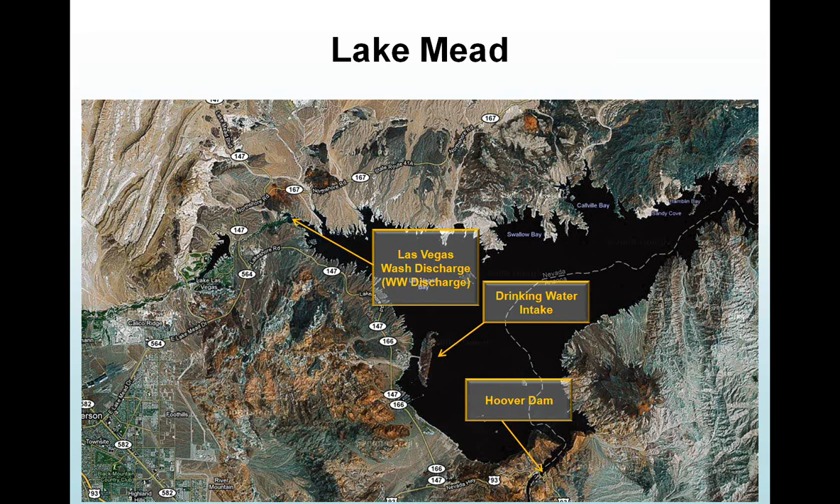Well... Renee? Mary, are you in your PowerPoint window? You're good? Okay, I'm not seeing mine, here we go. There we go, sorry about that.

So the next slide we have here is the process flow diagram, and basically what we're going to talk about today is this area. We are doing tertiary membrane filtration. We have direct filtration in that we inject alum, pre-screen to the pre-screens, and then Mary, sorry, we're still on Hoover Dam.

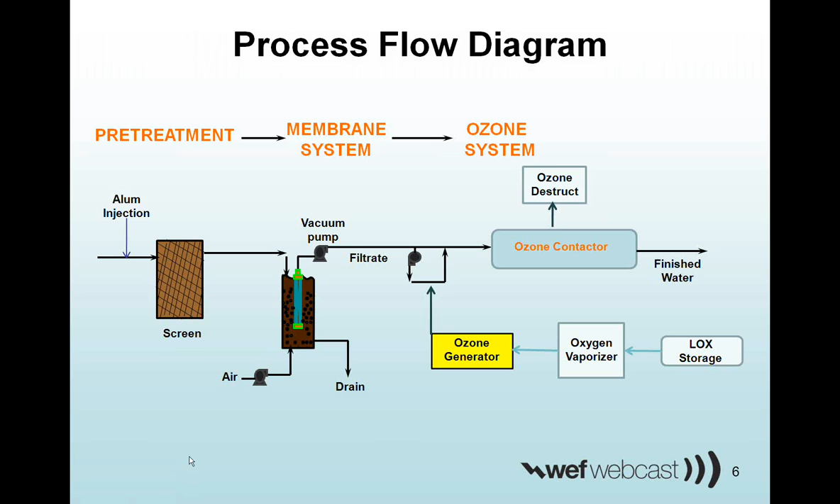Looking at the design criteria and parameters, we're designing a 30 MGD membrane facility. We have piping and pumping sized to accommodate 42 MGD, so we can expand without having to parallel or dig up a bunch of piping and pumping work. We can utilize some increased capacity in the membrane if possible. We have a drum screen that's 500 microns, in contrast to the MBR case study we just heard, which was 2 millimeter screens. So we're significantly smaller.

The membrane flux we're targeting is 20 GFD, about the same as that MBR case study. As Adrian talked about, membrane recovery, MBRs don't typically have membrane recovery as a design criteria or driver, but tertiary membranes are more towards a drinking water application. We run at a 92% target recovery, meaning for every 100 gallons that go in, we should have 92 gallons of treated effluent that can go out to the wash.

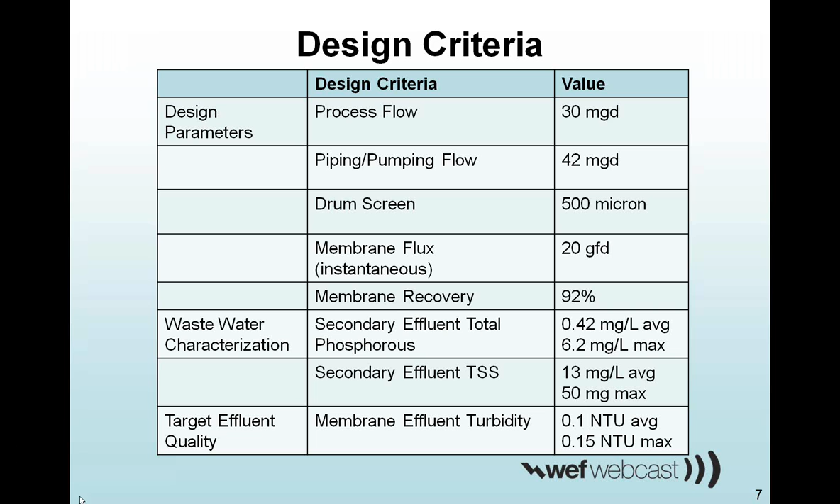So why did the district pick tertiary membranes? The real driver is phosphorus reduction. They are comfortable with their secondary process. They like their clarifiers. They have spent a lot of time over the last probably 10 years, maybe more, optimizing phosphorus reduction in their secondaries. So they already get down pretty low. 0.4 is significantly lower than other areas in the country, but not quite low enough for the valley here. So that's why they went towards tertiary.

Why not MBR? Again, they like their optimized secondary process. Retrofitting wasn't a strong driver for them. They have plenty of space, so that wasn't a real issue for them.

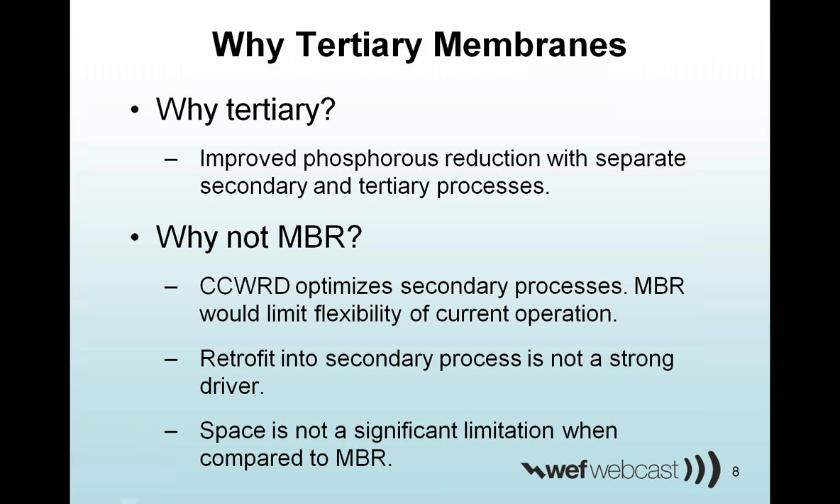So let's talk a little bit about the pilot testing, kind of wrap up the design criteria and the setup of the design, and we can go through the pilot testing and how that's going right now.

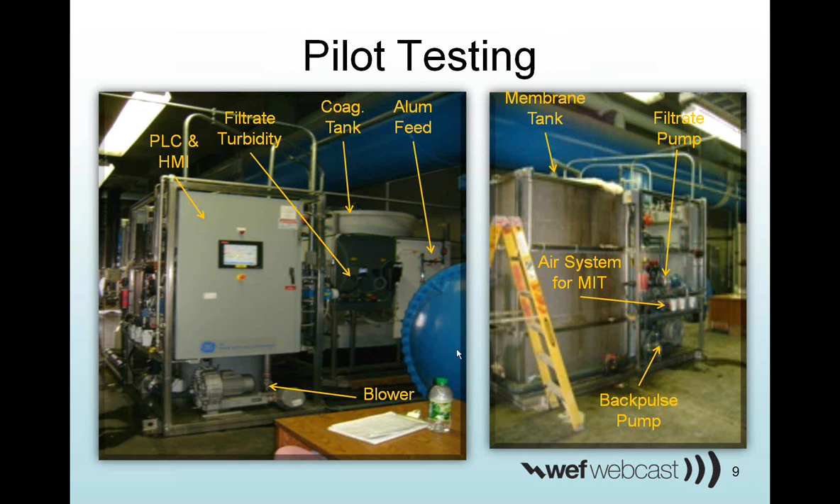We've talked about cleaning cycles. The start and stop of each one of these runs is basically a recovery clean. Our target for tertiary membrane filtration recovery clean interval is 4 to 6 weeks. That's a significant contrast to MBR, which we just heard runs at once a year and is happily fine with that—typically 6 months to a year you might recovery clean those membranes. But in tertiary filtration, we're using significantly less air to scour, and in turn we've got to chemically clean more often.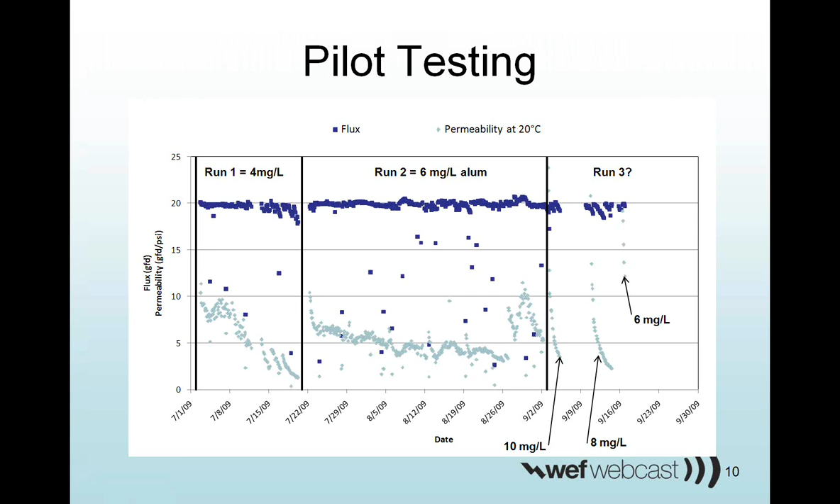So the pilot has been running for, I don't know, 6 months now or so, and we've gone through a lot of operational changes—just HMI changes and control changes throughout it.

In the meantime, over the last 3 years, we've been developing and designing the full-scale facility. So I'm going to take a few slides and talk about what the full-scale design entailed.

This entire area of the Clark County plant is dedicated to tertiary treatment, and what we have are existing media filters that are about 30 years old, in parallel to where we're going to be putting our membranes and ozone equipment. Above the media filters, we have some floc basins that are actually out of service—they don't use them now, and they don't use a lot of this equipment up at the top either. That was once a lime clarification tertiary filtration facility, but since they've optimized their secondary treatment so much, they've gotten away from a lot of this chemically intense process. So the purpose of this slide is to show that the footprint of what we're adding—membranes and ozone—is small compared to the massive footprint that was designed 30 years ago.

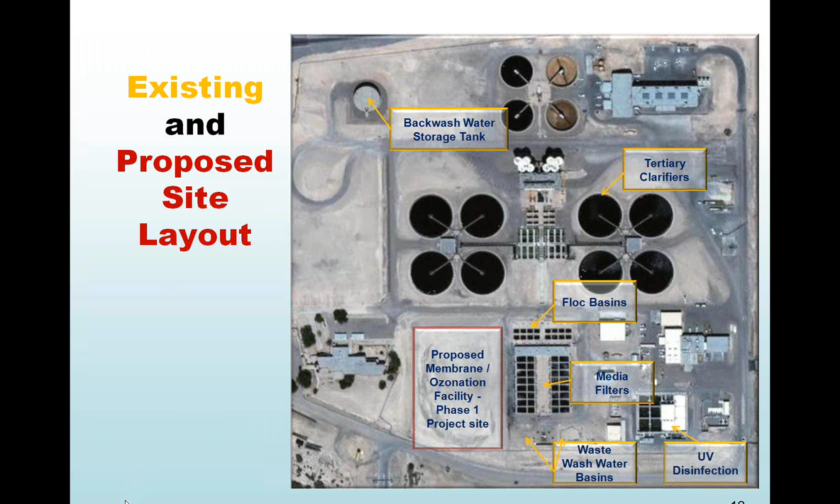A little more detail of where our equipment is going to go. Here's the existing media filtration to get you lined up. We will be retrofitting the drum screens into these floc basins up here, and then have room for expansion of our membrane building for an additional 30 MGD. We also have a tunnel that will eventually meet up with an enclosed building that will hold ozone and membrane equipment. For this phase, we designed equipment pads with shade structures, and then we have an ozone contactor. It's important to isolate your acid waste from the rest of your waste, so we've isolated it so it can go to the head of the plant.

In comparison to Benita's photographs, we have an architectural rendering of what our facilities will look like—a little less flare than the Arizona facility, but we're out in the desert, pretty far out there, and it's functional and operational. We have an enclosed building for the membranes themselves, and then two shade structures holding the ancillary equipment for the membranes and the ozone equipment.

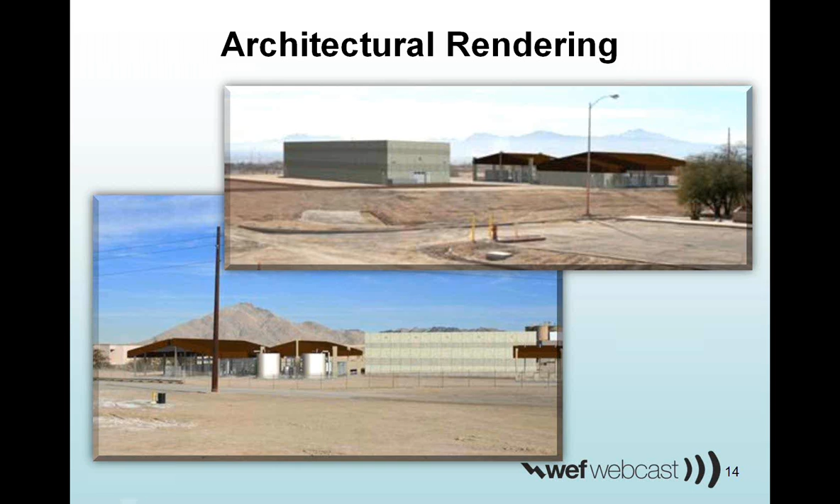This hasn't been built yet, so I don't have any photos of what the real deal looks like, but we've got some 3D cuts of the design. This is the membrane building. The design is 2 trains with 6 cells for each train—one train aligns right here with 6 cells, 1, 2, 3, 4, 5, 6. There's a parallel train on the back side of this building that runs on the other side.

Each one of these cells has a dedicated filtrate pump located on a lower level, so it's submerged, with flooded suction. And then we've got piping and piers down at the bottom level.

Our soils aren't the greatest, so we've had to bulk up the structure a little bit. We have this tunnel that will eventually go into the ozone building and hold the membrane ancillary equipment. Functionally as designed, it's also the chemical injection point and heating area where we heat up our cleaning solutions so they'll more effectively clean.

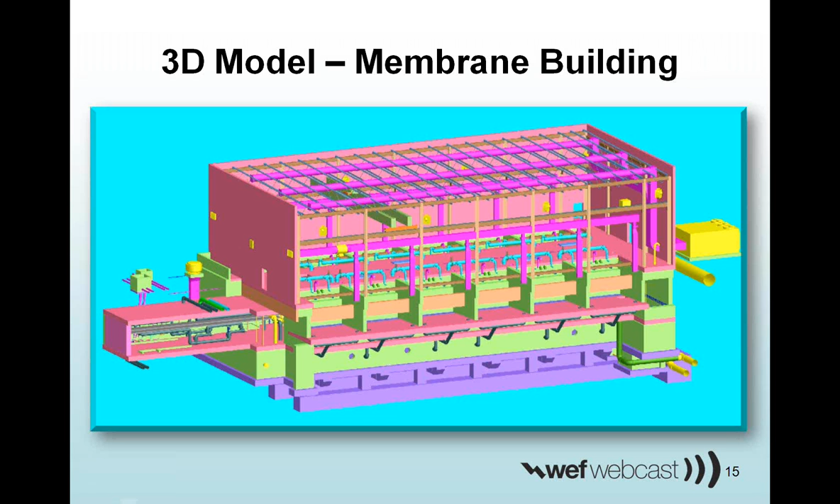And here's the membrane equipment pad. We've gone through some of the ancillary equipment in other slides, but we have 2 blowers, and behind here we've got 2 compressors, which are used for the air actuated valves, as well as the membrane integrity testing air.

Then we have recirculation pumps for our cleaning solutions in the back, and space allocated for the potential of a softened water system for cleaning. The water out here in the valley is pretty hard, and the thought was mixing bleach with hardness might cause some precipitation, so we've allocated space for a softening system if that's needed.

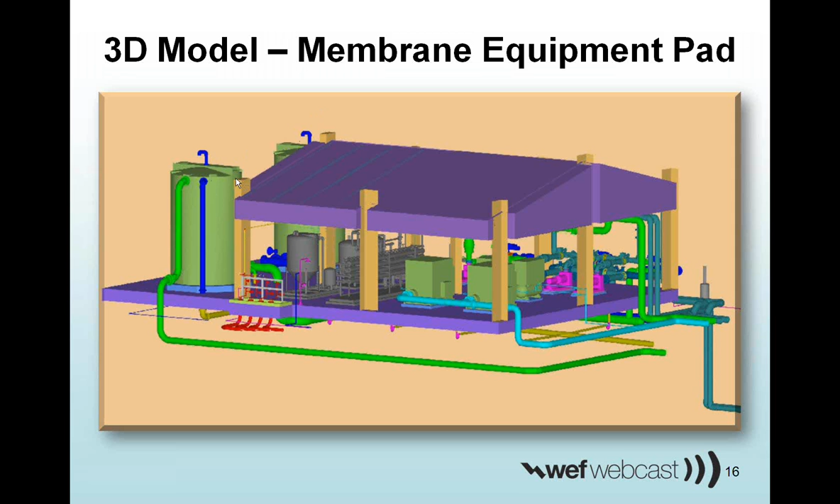And on the back side here, we've got filtrate tanks so that we can have some water ready and available for the cleaning solutions as it's made.

So when we walk through the design, we're at a facility that's existing. It's old, and a lot of the equipment doesn't work anymore, or they don't use it anymore. So we went through each structure and said, can we use this for what we're doing in this expansion? Does it fit our needs? Basically there was a yes, a maybe, and a no.

The drum screens we did select to retrofit, and I'll show a retrofit 3D of that in a second. And then for the membranes, there's the possibility of retrofitting the existing media filters with membranes in the future.

The downside is retrofits typically are more expensive and more complicated construction-wise, and it has to be worth what you're saving in concrete to actually go towards retrofitting membranes. But it's still definitely on the table as a possibility in the future.

And then we looked at the existing chlorine contact basin, and since we're going to ozone, we looked at it to see if it would be appropriate for an ozone contactor, and it basically came down to no—it's the wrong size, with the wrong length to width ratio for ozone contacting.

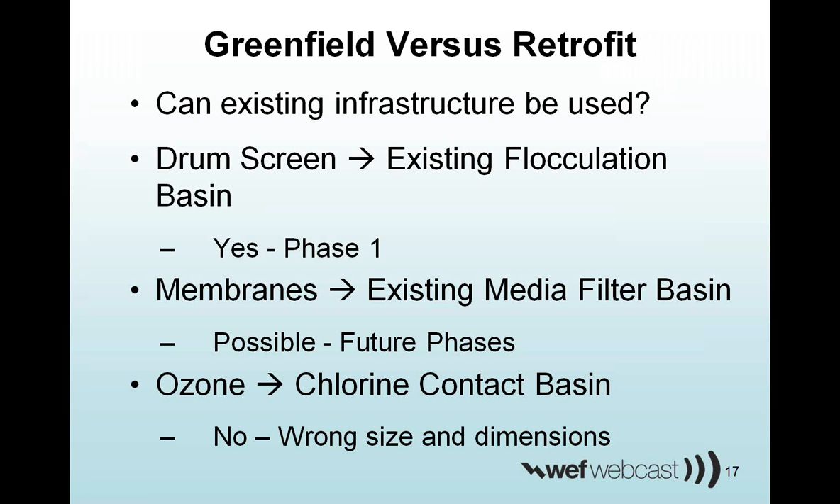So here's some photos. I'm going to walk through how we're going to retrofit the drum screens into the existing concrete structures, and here's a few photos of what these drum screens look like.

This is in contrast to the band screens being used in Benita's case study. Band screens can't go down to a 500 micron screen size, and there are other screens out there that can go down to 500 micron, but not at the flow rates we're looking at—we're looking at a 50 million gallon a day screen here.

So there are only a couple selections of technology out there that are appropriate, but here's one, and the flow goes from the inside of the drum to the outside—flow comes in, around, and then out the screen. We'll take you to a cut of it.

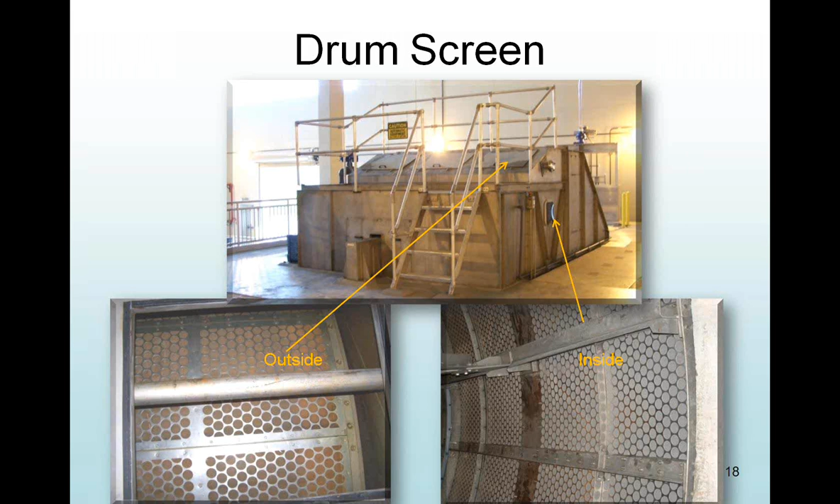So looking at also going in parallel, or having a parallel installation to an existing facility, we had a significant number of hydraulic interfaces that we had to keep in mind when we were designing.

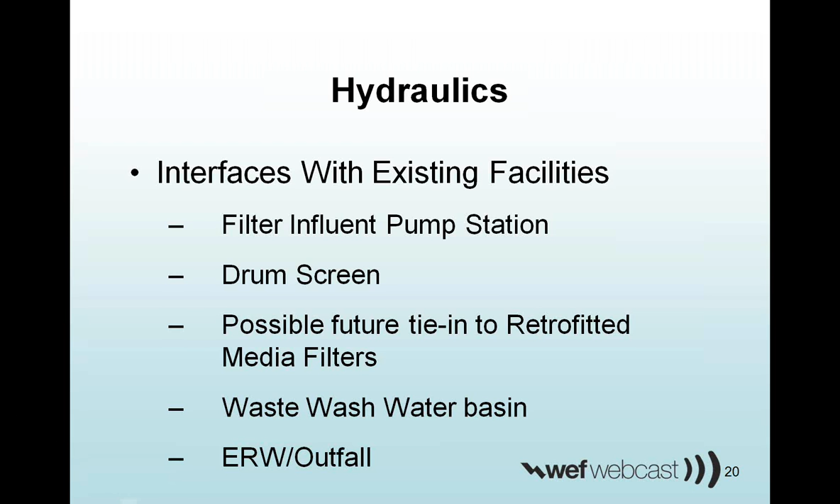A quick look at the hydraulic profile—we're kind of all over the place, but this is determined basically from the existing facility, and then we're able to use pumping where necessary to achieve that existing hydraulic profile. We're tied at the front end from the FIPS with their filter influent pump station.

They have existing capacity in that pump station, and we're tied at the back end at their outfall, basically, hydraulically. So we utilize a pump in the middle to get our flow through.

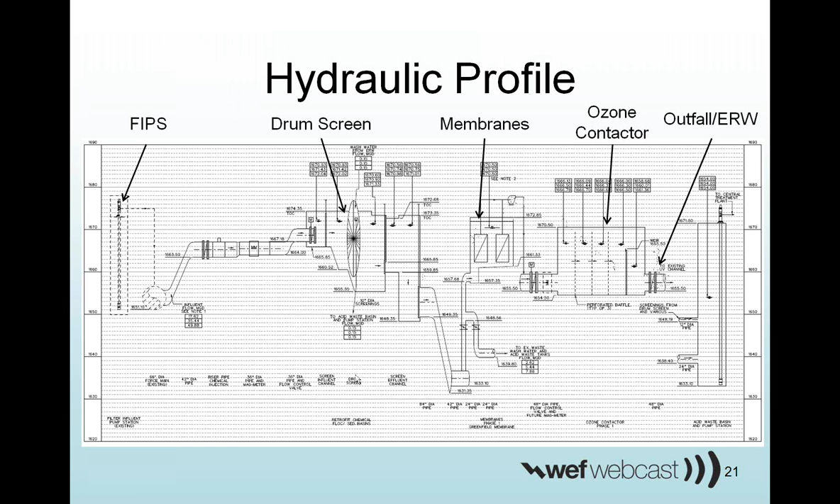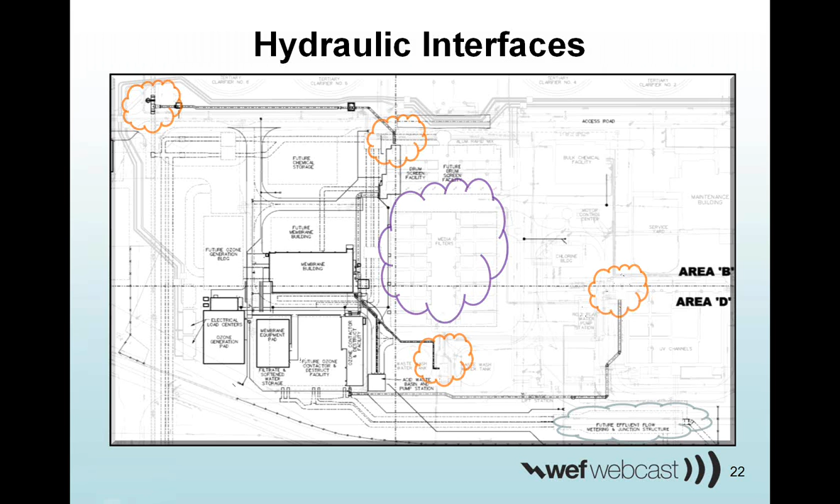So to wrap up the design portion, we looked at and evaluated through design and pilot testing some of the operational challenges the district will have to deal with along the way, or that design has dealt with along the way.

Thinking back to the 3D of the membrane basin, you can see there are 12 cells operating at any given time, with backwashing sequencing going on every 20 minutes or so. If the sequencing isn't controlled, we could theoretically have all these systems go into backwash at the same time, or go into a tank drain at the same time, overloading the system while also not being able to take the water coming to it. So having the backwash sequencing correct is critical to the process.

Another thing we've learned through pilot testing is that membrane integrity testing for wastewater treatment plant operators is a whole new ball game for them. There's not a whole lot of research or experience out there with membrane integrity monitoring using air pressure decay tests. So getting results from a membrane integrity test—how should we evaluate that, in the same way we evaluate drinking water facilities? We're working through those questions.

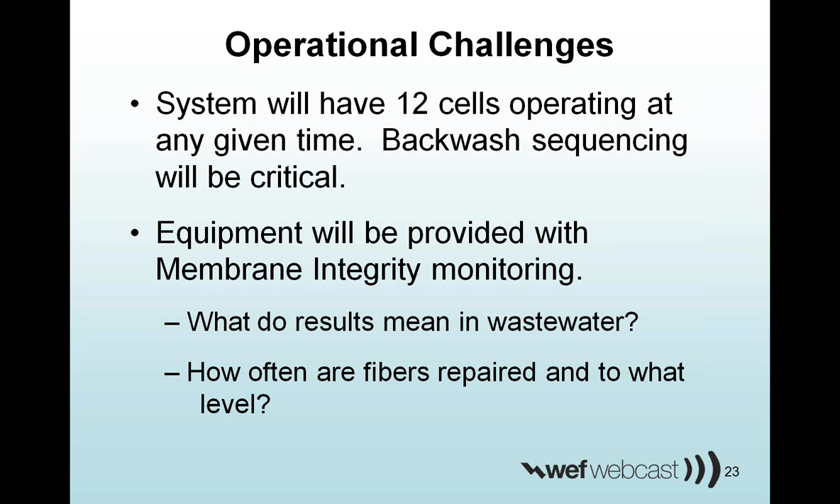So to recap, we talked a little bit about water quality, and phosphorus is the key here. We went through the design, the pilot testing, and some of the results, and then reviewed the operational challenges and how the operations staff will be able to take over this new facility when it comes online. With that, if there are any questions, I'll be happy to take them.

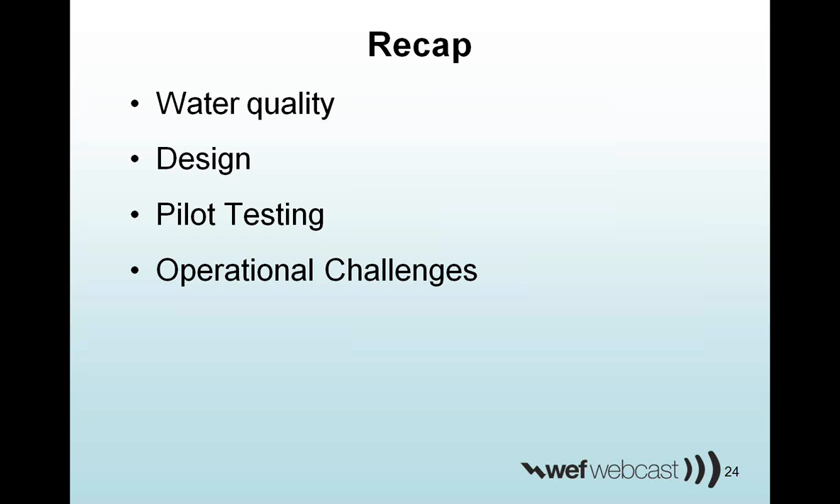I have a number of questions for you. First one is specific to your project: what are the engineering, capital, and O&M costs for the plant? Do you have those at this point?

We actually have bid numbers from yesterday—we did reject all bids. So it's around $55 million, in that ballpark. We've had several bids come in between 50 and 60 million, and that's including the ozone system.

And that's current construction pricing? Yes. What about the other ancillary costs, the engineering costs, and have you done an estimate for O&M? We have not completed an estimate for O&M since the preliminary evaluation or preliminary design phase, and I don't have those numbers off the top of my head. I know we're slated to round up those numbers over the next few months.

Next question is regarding the Clark County plant: how do they do phosphorus removal? This is obviously a tertiary plant, but how do they do the phosphorus removal upstream of that? Sure, they have an activated sludge conventional secondary process, which was shown in several of the introductory slides.